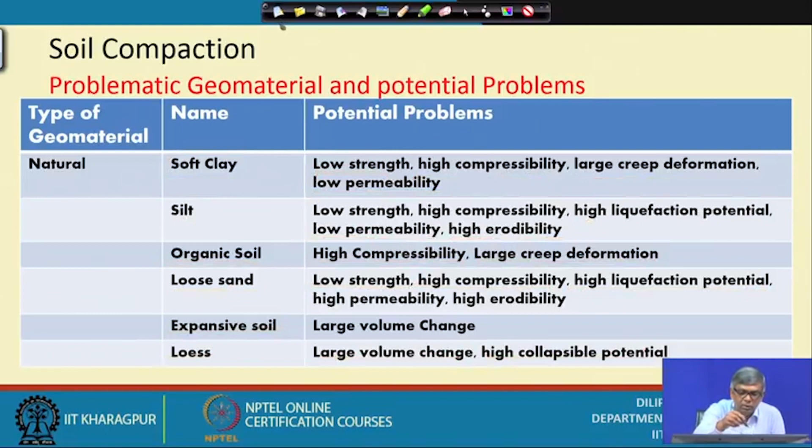Now, if I go to fill material, different types of fill material are also possible. If it is uncontrolled fill, the filling is not done properly. But if you put a layer and compact, put a layer and compact, that is controlled filling, and that will have the desired quality for construction.

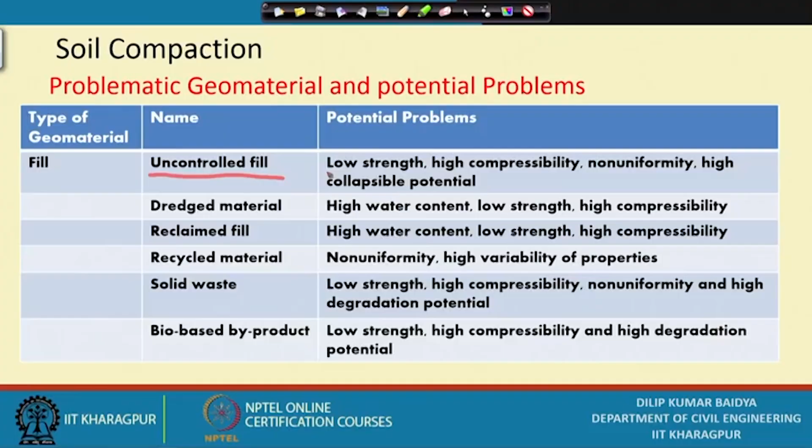Whereas, if it is uncontrolled and randomly dumped in different directions, then this type of soil will have low strength, high compressibility, non-uniformity, and high collapsible potential. So that is why it has to be handled properly.

A dredged material, when it is dredging material, comes in chunks, and if it is filled, it will have high water content, low strength, high compressibility. Reclaimed fill also has high water content, low strength, high compressibility. Recycled material shows non-uniformity and high variability of properties, and solid waste will have low strength, high compressibility, non-uniformity and high degradation potential. Bio based byproduct again has low strength, high compressibility, and high degradation potential.

So that means two types of material, natural or fill, but these are the identified materials where if you try to construct something, you have to be careful. That means, what? Directly you cannot do anything, particularly if it is an important structure. What do you have to do? You have to do some modification. After that, when it becomes suitable, then only one can make the desired structure.

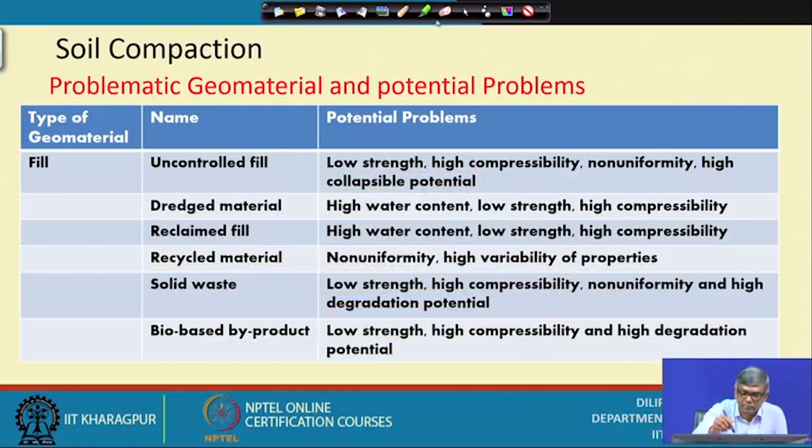Now we are in a topic of soil compaction. There are different ways soil can be modified. I will talk about soil compaction now. Compaction means actually what? To press closely together. Compaction means two particles, suppose you have to press them and bring them closer, and if you do that particularly in soil, it means they press the soil particles tightly together, expelling air from the void spaces.

We have already done the 3-phase diagram. I have shown that in the soil mass, if I model it, then I can get a solid volume and I can get the voids volume. So that voids amount, if I can remove, and if I force the particles to come closer, then voids automatically will be reduced, and by that way soil gets densified, and densified soil will be better soil. So that is what compaction is, the purpose of compaction is to expel the voids and bring the particles closer.

And then consolidation also results in reduction. So there is another topic, consolidation, which I will be discussing later on. Consolidation also is a phenomena for saturated soil, and in the 3-phase diagram we have shown three situations. One is entirely dry, in that case air and solids, and there is one in between, and then there is another extreme, where the entire voids is filled up with water and then solid.

So then in the consolidation case, actually it has to be a saturated condition. When somehow we manage to make the water come out, then when water comes out, the same amount of volume of soil also compresses. So that is also reduction of void ratio, and here actually in the compaction also, by some means, we are reducing the voids and bringing the soil closer and reducing the volume. Both cases result in reduction in volume.

So consolidation I will discuss later on, but right now I am just mentioning consolidation also results in reduction in void ratio. So compaction is reduction in void ratio, consolidation also is reduction in void ratio, but consolidation and compaction are not the same, because the mechanism is different.

Compaction is instantaneous, that means immediately I apply force and bring the soil particles closer and get compacted, whereas consolidation is a slow process, that means you apply some amount of load. Because of that load on the saturated soil, initially excess pore pressure will develop, and because of this excess pore pressure, water comes out through the interconnected void spaces, and when water comes out, the same amount of volume of water coming out, the same volume of soil mass will be reduced.

And another difference: compaction is instantaneous, whereas consolidation takes a long time, and consolidation actually requires saturation as the essential condition, whereas compaction does not require that.

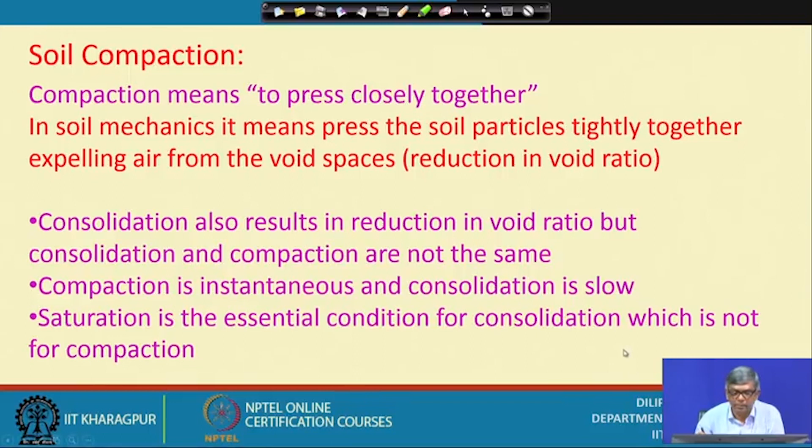Now soil compaction, what is the purpose? Purpose of compaction is compaction increases soil's density, and the immediate effect we get is the soil particles come closer and density gets increased, and that gives you several benefits. The three most important are increase in shear strength, decrease in settlement, that means compressibility, and decrease in permeability. So these are the results of densification. These three effects are beneficial for the construction of various types of earth structures, namely highways, airfields, earthen dams, etc.

Greater the compaction, the greater will be the benefits. Compaction is the cheap and effective way for improvement of the soil properties. That means, as I have mentioned, if you identify a problematic soil, that can be modified in different ways.

One simplest way is that the entire soil can be removed, and one can bring good soil and fill it up. That is one way, of course, but that sometimes may not be feasible because of the cost.

So there are several other alternatives, and one alternative is compaction. This compaction is chosen many times because it is very cheap and effective, and it does not require specialized workmen or very specialized equipment. Because of that, this is very popular.

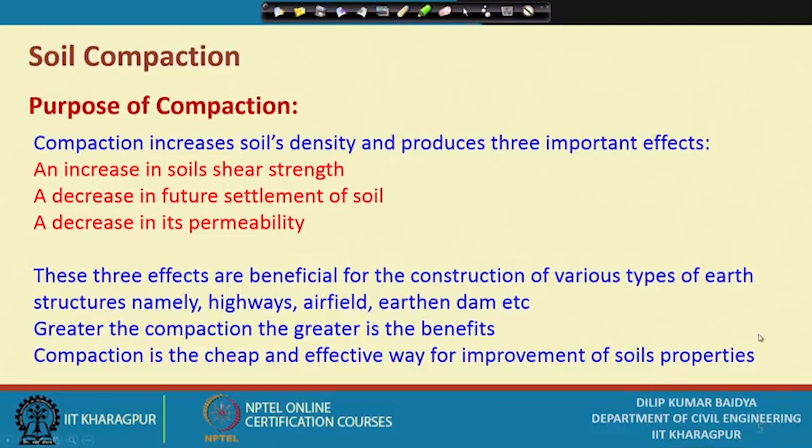Soil compaction typically we do by using different things: a roller, which is sometimes a rubber tire roller or a smooth wheel roller, and sometimes plate compactors. In different ways, we put a layer of soil on it and apply some weight over it, and the soil automatically gets compressed. That is the simple mechanism generally used in compaction.

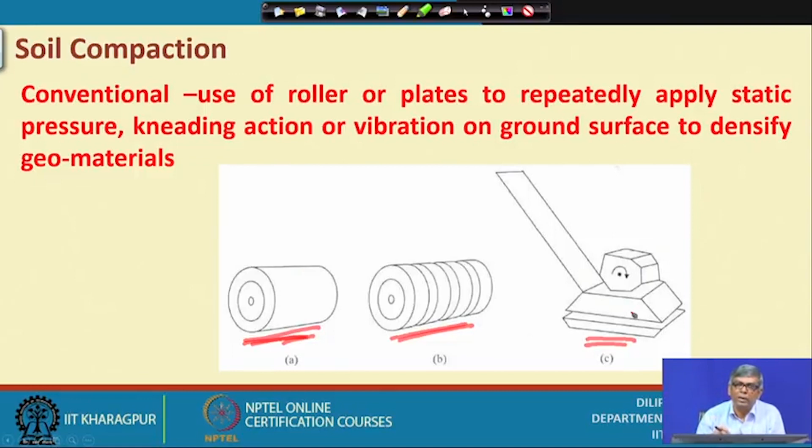With a plate vibrator, if I apply just pressure or load, sometimes soil will not get compacted, particularly granular soil. When we apply vibration in addition to the weight, because of this vibration the smaller soil particles can enter in between the bigger particles and make a more compact, stable arrangement. Because of that, this type of compactor is used, meaning in addition to the weight we add some vibration.

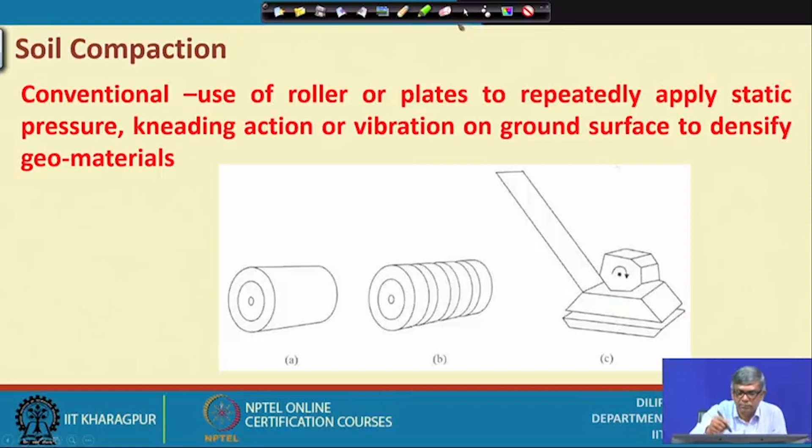Compaction is quantified by its dry unit weight, which can be computed in terms of bulk unit weight and moisture content. At the beginning we considered gamma d and gamma bulk, and we got the relationship between gamma d and gamma b as gamma d equals gamma b over 1 plus W.

This was done at the beginning. So when we compact the soil, how do we quantify the soil compaction, whether it is good or bad? By measuring, estimating, or calculating the gamma d, when this compaction is taking place.

We go in some interval, do some measurement, and find out the dry density. When we see that the dry density reaches a desired value, then we declare that the compaction is satisfactory or done properly.

Initially we cannot find dry density directly; we can find out in the field the bulk unit weight and determine the moisture content. So by knowing the bulk unit weight and moisture content, we can find out the gamma d using this equation. That is how we quantify the compaction, or degree of compaction.

Some soil can be compacted with gamma d equal to 1.6, some soil can be compacted to 1.7, some to 1.8, and so on. Compared to gamma d of 1.6, a gamma d of 1.8 is definitely a better compaction.

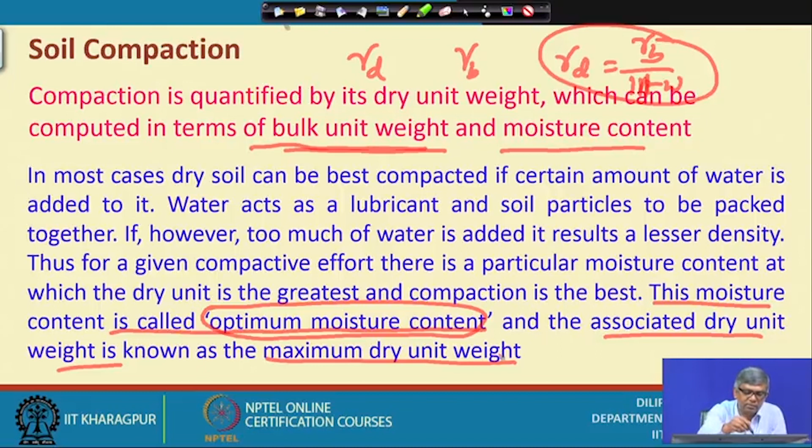So that has to be specified most of the time, and if we test a soil in the laboratory, generally we get a compaction curve.

As I have mentioned, we cannot add water excessively, so you have to do trials initially.

You have to start with some minimum level of water content, maybe 4 to 6%, and then compact. For compaction there is a standard procedure given by standard Proctor, that is the name of the person.

He has given the specification for Proctor compaction, what the energy level will be. There is a hammer that falls from a particular height. The hammer weight is 2.5 kg and it falls from 30 centimeters, and you have to give 25 blows.

By that standard if you compact the soil, and then take the bulk weight and find out the water content, from there we can find out the dry unit weight. Suppose at 4% water we get one point, based on that water content is exact and dry unit weight is this. Then again adding 2% or 1%, we get another compacted sample, and based on measurement we get another dry unit weight.

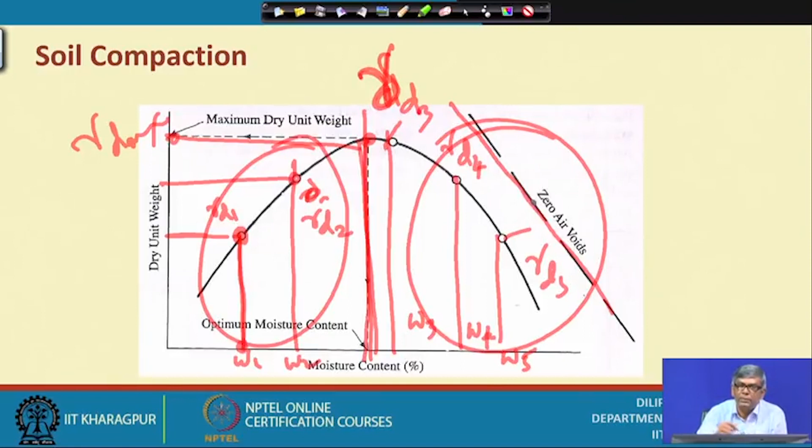Now, as I mentioned, when we conduct the test, we are talking about the energy and the soil type. Some soil, using a constant energy, can be densified to some dry density. If I take some other soil, you may not be able to densify it by the same amount of energy.

That means it depends on the compaction; the optimum moisture content and dry density are also characteristics of the soil. In a particular soil we will have a particular optimum moisture content and a particular dry density.

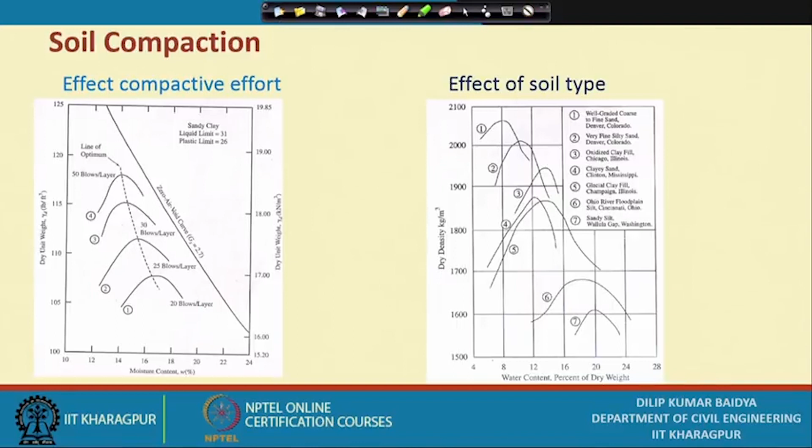And now, soil compaction. I will discuss several things, but during compaction, generally different types of compaction equipment are used.

There is smooth wheel compaction. The smooth wheel roller employs 2 or 3 smooth steel rollers, and it is useful for compacting base courses and paving mixtures. It is also used to provide smooth finish grade. Smooth wheel rollers provide compacting effort through self weight only. These rollers are generally huge and made of steel, and that weight itself gives the compacting energy. These are useful for compacting base course, paving mixture, and also provide a smooth surface.

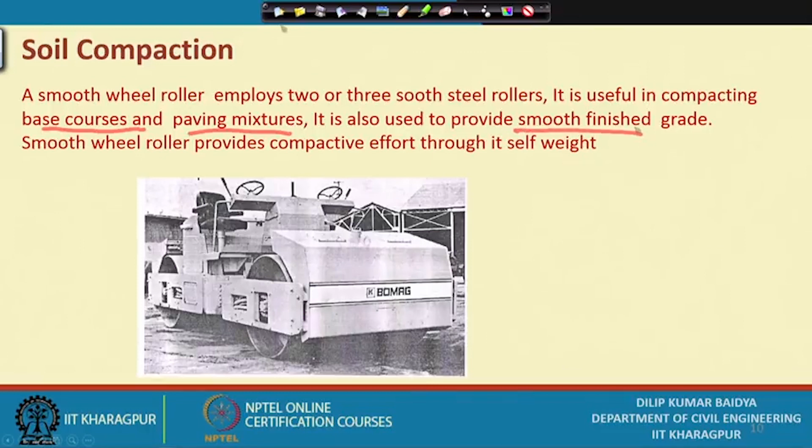Then next, another type of roller, the sheep foot roller. What is a sheep foot roller? When the soil is fine grained, as I mentioned, you need more moisture and get less dry density. To improve the dry density, sometimes we have to give more energy.

So to give more energy, what we can do is use a roller that has an extended part, like small hooks at the end. When this roller moves through the soil, the contact area will be small. When the contact area is small, there is more pressure, meaning the same weight acts on a smaller area, so the energy is more. If it has these projected parts, that is called a sheep foot roller. Through that we can apply more pressure, since the contact area is reduced.

Another thing is, since it has spike-like projections, it has a kneading effect. So for fine grained soil, this is very much suitable. The sheep foot roller consists of a drum with attached projecting feet. The area of contact between soil and roller is less, causing greater compacting pressure, and it also provides kneading action, making it effective for compacting fine grained soil. So for clayey soil, this type of roller is good.

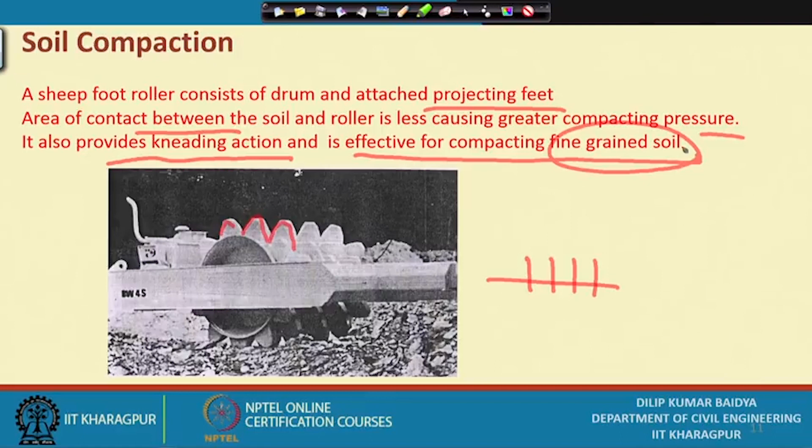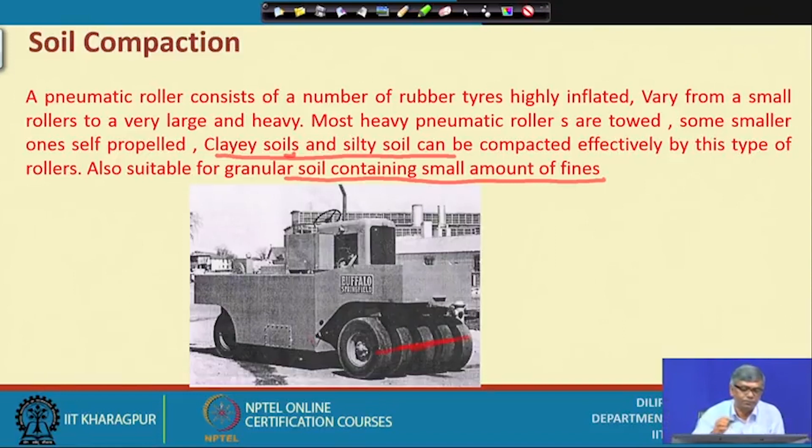There is another type of roller. As I mentioned, when it is granular soil, compaction by weight alone is generally not that effective. Because of that, if you can provide some sort of vibration along with this weight pressure, it becomes effective. This type of roller has a moving element that also vibrates while moving. That vibration causes particle adjustment, and there is also pressure through the weight. So these two together compact the soil nicely.

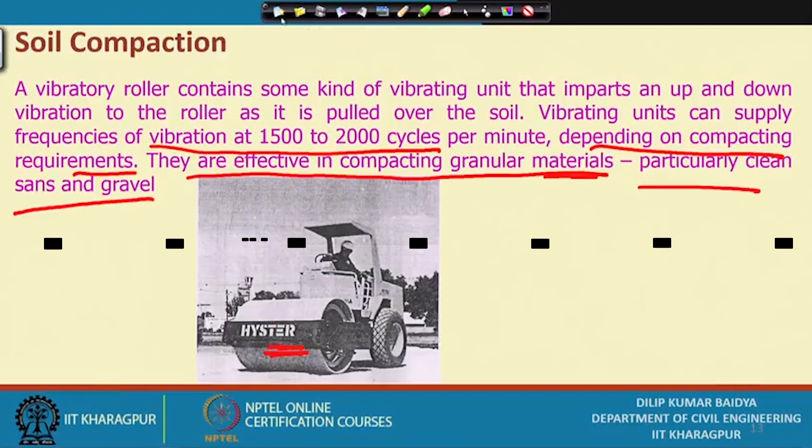That means at a time compacting 1 meter will not be effective. So what you have to do with this type of soil is put it in layers, and those layers should be thin. For low plasticity soil (CL, ML), again sheep foot roller, and rubber tire can also be used as second choice, but not the first choice.

Moisture control is critical. For plastic sands and gravels, vibratory and pneumatic roller both can be used, and pad foot roller, which we have not discussed yet, is also a second choice. For silty sands and gravels, again vibratory roller is first choice, second choice is rubber tire roller, and moisture control is critical here. For clean sand (SW, SP), again vibratory roller, and impact and rubber tire roller can also be used, which we have not discussed yet.

For clean gravels, again vibratory roller, rubber tire roller, and impact grid roller can be used - some of these I have not discussed, including grid rollers, so I will not discuss this much here. These are the different types of soil we may encounter during construction, and this is our choice. These are the first choices, and sometimes second choice equipment can be used if other equipment is not available.

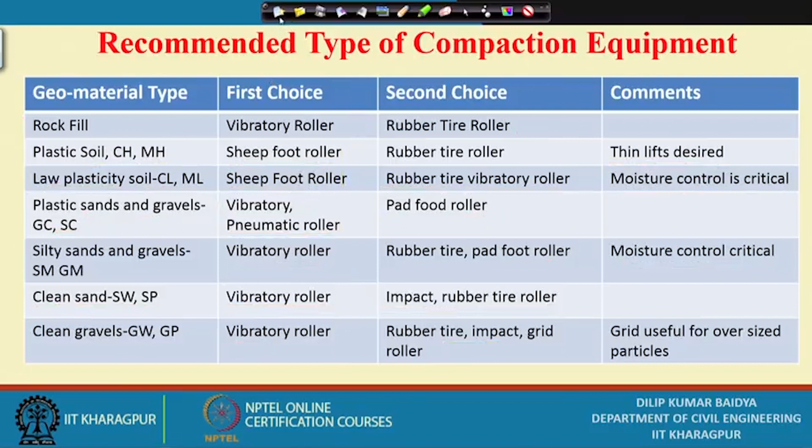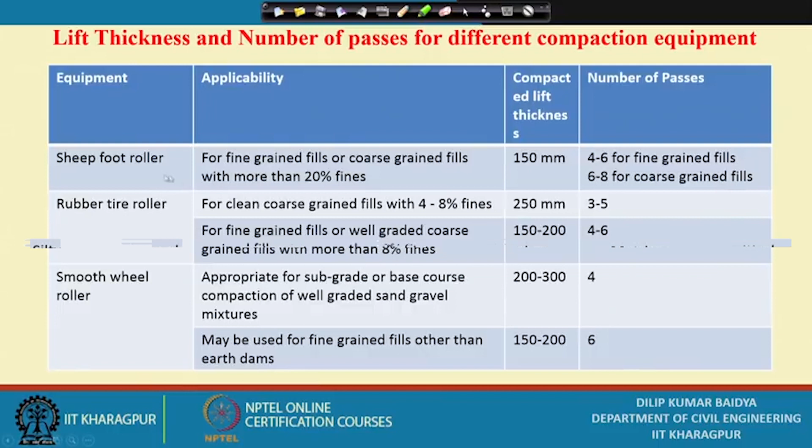This is the sheep foot roller. Generally, its applicability is for fine grained fills or coarse grained fills with more than 20% fines, and compacted lift thickness is also given. The compacted lift thickness is 150 millimeters, with 4 to 6 passes for fine grained fill, and 6 to 8 passes for coarse grained fill.

If it is a rubber tire roller for this type of soil, then 250 thickness. For fine grained fills or well graded coarse soil, 150 to 200 thickness with 3 to 5 passes, or 4 to 6 passes for another case. If it is a smooth wheel roller for this soil, you have to give 200 to 300 thickness and 4 passes. For fine grained fills other than earth dams, the lift thickness will be 150 to 200, and 6 passes have to be given for reasonably good compaction.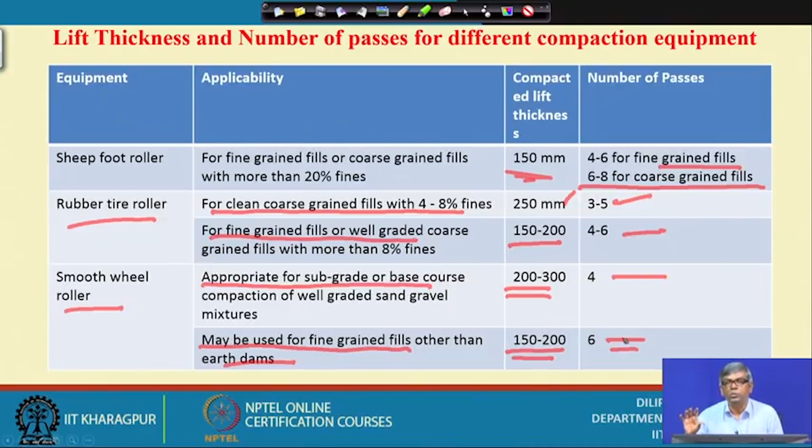These are the last 2 slides I have shown on how to choose the compaction equipment, and once you choose the compaction equipment, these are the guidelines for how much thickness you have to put in each layer and how many passes you have to give. So these 2 guidelines can be used for selecting during compaction.